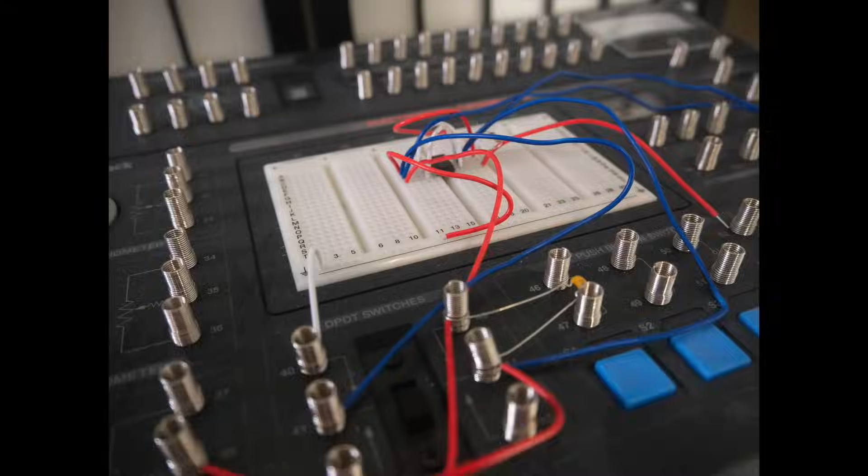Creating a two-dimensional drawing in a computer-aided design program such as FreeCAD or Tinkercad or Fusion 360 is very much like drawing in something like PowerPoint. It's really very easy to do.

But when you're creating a three-dimensional object, like this object here, you use a very different technique. Depending on the program you're using, you do start with a two-dimensional drawing. And then you extrude it, you expand it from a two-dimensional drawing into a three-dimensional shape.

But if you need to modify that initial shape, you create a second shape. And that second shape is used to cut out material from the first shape. In simpler 3D design programs, that second shape is called a hole. In more sophisticated 3D design programs, often you refer to that as creating a tool that you use to cut one shape from the other.

So before we get started with FreeCAD, I want to reinforce this concept of positive shapes and negative shapes and using one to cut the other. And because it's the easiest program available for doing this, I'm actually going to use Tinkercad.

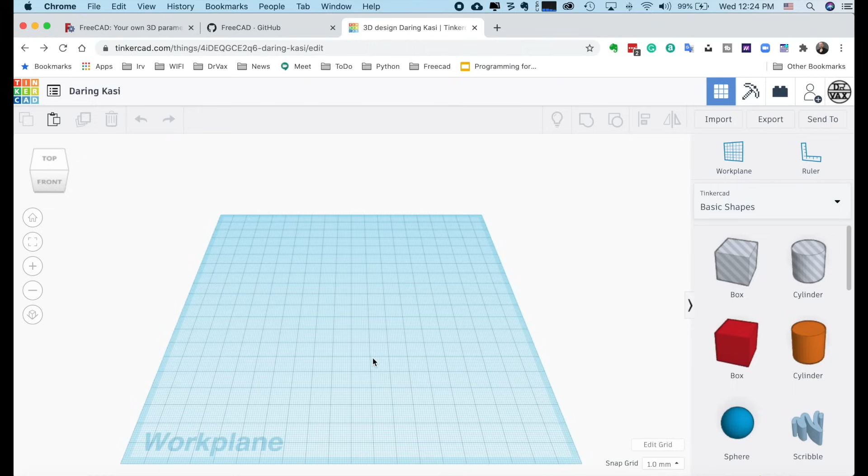So let's look at the screen together. First, I'm going to take and click on and drag a box into my work plane. Then I'm going to make it a little bigger by dragging on the corners. And a little bit taller. And then we'll drag it to the center.

Now, one of the advantages of Tinkercad is it's a direct manipulation program. You just grab onto the corners of an object to change its size. You click on the middle and drag to move it around. It makes it very easy to use.

Most professional 3D design programs do not quite work that way. And so as an example, when I try to use a program like Fusion 360, and I've used it successfully, it's a little different for me because I'm used to sort of the PowerPoint approach where you just create an object and drag it around.

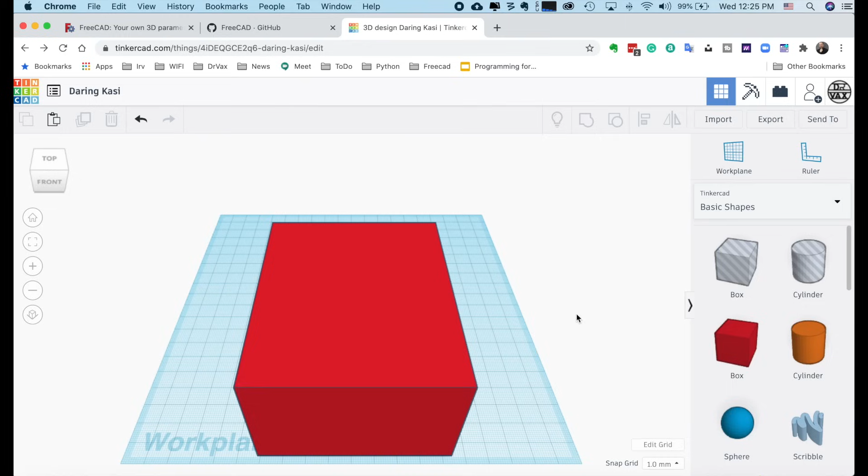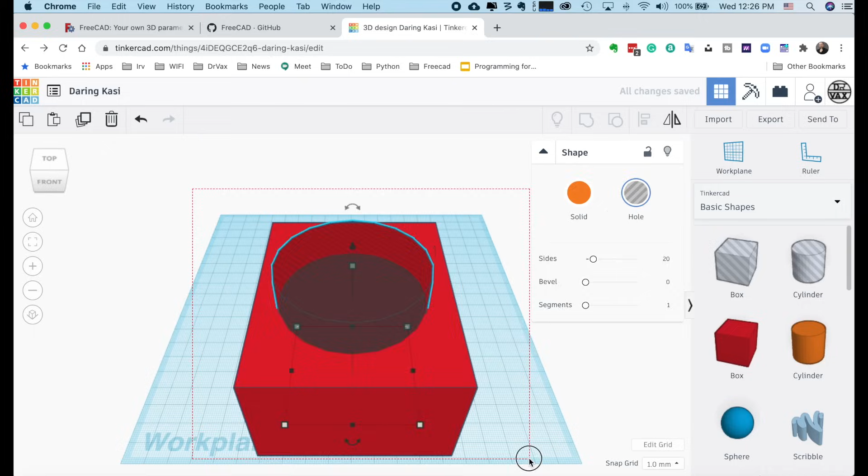Tinkercad is like that. Now, if I want to cut a hole into this rectangle, I take and I drag a cylinder into my space, and I can make it bigger in either or both directions. I can drag it into the middle of this box, and I can push it down a little bit. Now, if I group these two items together, I will have a hole in the middle of my box.

That concept of creating a base object and another object and combining it with it, or using it to cut a shape out of one object or another, is very important to understand computer-aided design.

Now, let's take a look at FreeCAD. And why bother? This seems so wonderful. Well, Tinkercad is extremely easy to use. I still use it all the time. And in fact, you can build things somewhat sophisticated.

It would definitely be possible to do something like this in Tinkercad. But how would you do it? This isn't a rectangle, it's sort of an odd shape. How do you hollow it out?

Well, in Tinkercad, to hollow it out, you could create two versions of the shape. One that is a solid, and then a second that is a hole, and group one in the center. You can hollow it out. But in a professional CAD program, actually, as you get to more sophisticated shapes, it's much easier.

So why not start with a professional CAD program? Because they're complicated to learn. So I'm going to challenge you: make the investment to learn traditional computer-aided design.

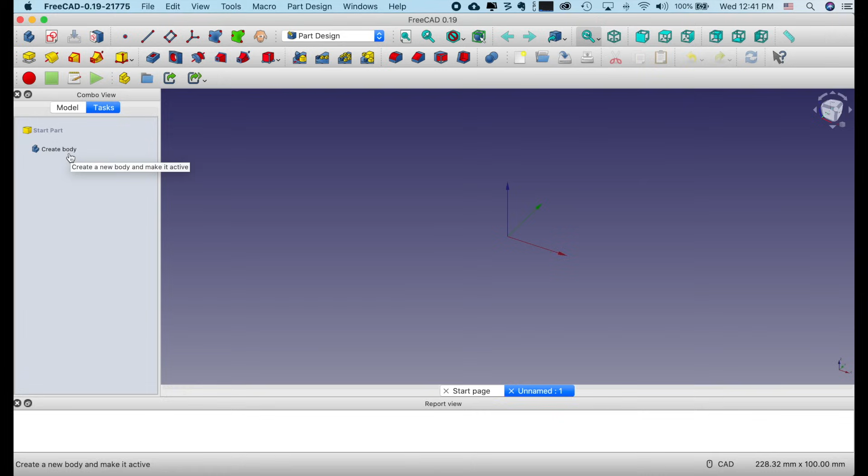In order to do something to an item, you have to have a currently selected workbench. Once again, we want to use the part design workbench. You'll see we'll have the part design toolbars here. I'm going to create a body. A body contains the part we're going to draw with. Now I'm going to create a sketch.

Now, we could model this a couple different ways. We could draw a rectangle and extrude it or pad it up and then cut out this shape. That'd be hard to do. If instead, and this is where you start to think like a computer-aided design expert, you take and draw this shape and extrude it in this direction, then your whole model is going to be created, and we just have to cut out the inside.

Now, this little area on the bottom is actually a 3D printing brim that's designed to be peeled off. I actually liked it. It made the model a little more stable, so I left it on. The reason I used a brim is this first one I printed, and here I'll show you here so you can see, it warped. See how this bent up?

3D prints warp when the temperature across the printed surface varies. You print it on the bottom, it's hot, it starts to cool here, but it's hot on the top, and conditions like that can cause it to warp. You can fix that by adjusting your print temperature, by enclosing your printer, and by adding a brim. So for this one, I actually lowered the print temperature, both the print bed and the print, and added a brim. This one printed very nicely.

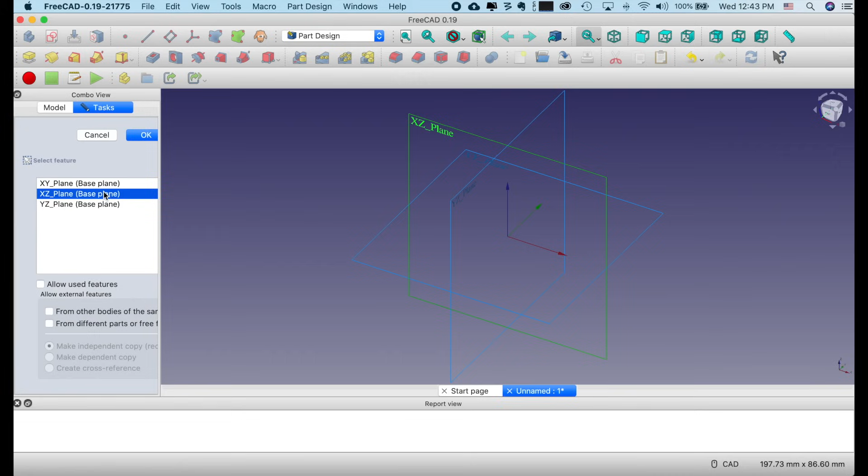We're going to model this on the XZ plane because Z is this way and X is this way. Click on OK. Now see this big dot in the middle? That's our origin. But when I mouse over one of these axes, or I mouse over that dot, it changes color. We're going to need to recognize that in the future when we want to connect dots together or place items.

So the first thing I'm going to do is select a tool. I could select a point, a line, an arc, a circle, a conic. I could select a rectangle, a polygon, all sorts of different tools here. We're going to select what's called a polyline. So I selected that tool.

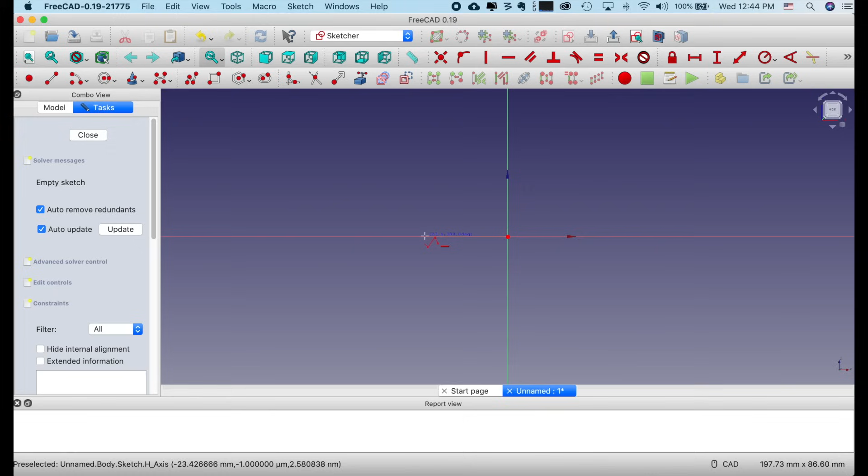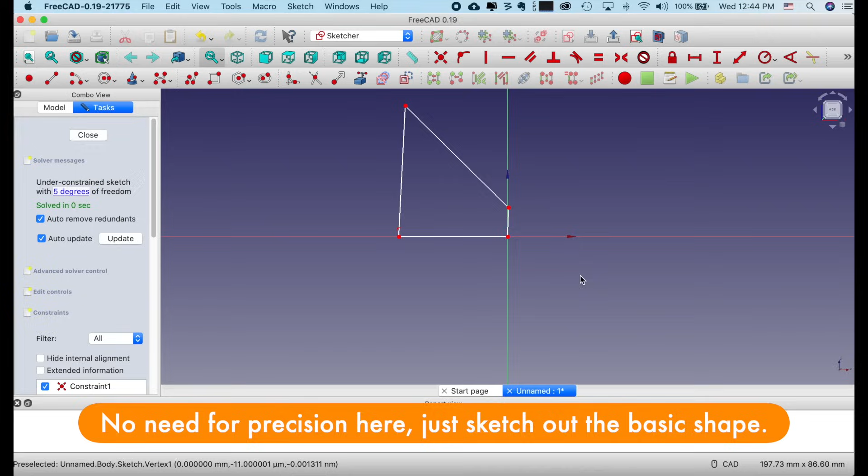Now we're going to start it right on the origin. Click once, drag, and then we're going to click on the base. So click once, and I'm clicking with the left mouse button. Then it goes up a little bit. We're going to click. Then it goes down to sort of in that kind of angle. Click. Then we're going to try to find that exactly that white dot and click on it. Now I'm going to click the right mouse button to say I'm done with the tool.

So we have sort of a basic shape here. And what we can do is you can see we can move this shape around like this. Now these axes also move around. This point here is locked in place. Why?

Because we started it on the origin, this point here is locked in the horizontal direction because it was on an axis. So how do we lock the rest of these?

Well, we use these items up across the top, which are called constraints. A coincidence constraint says make two points the same point in the same place. A point on object constraint says align a point with a line. We have a vertical constraint, a horizontal constraint. We have a parallel constraint. We have a perpendicular constraint. We have a tangent constraint.

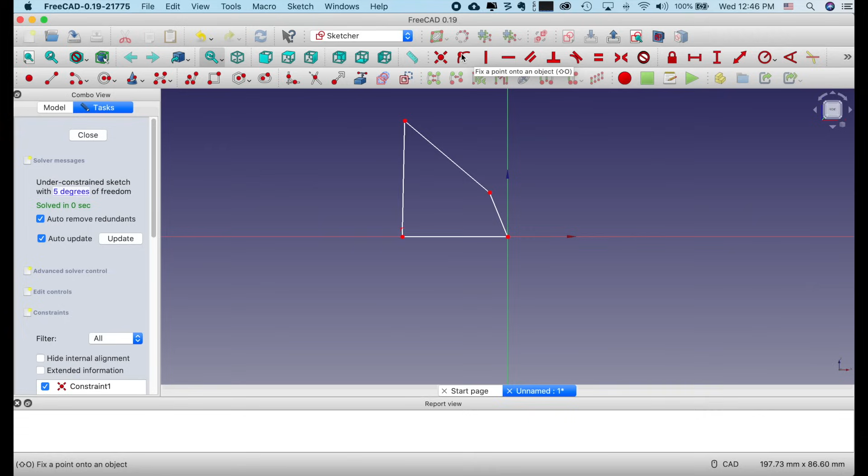This actually was not a tangent constraint, I said incorrectly. That fixes a point on an object. This is a tangent constraint. We have an equal constraint that would be used if you want to make two objects, two line segments as an example, equal. We have a very useful constraint, which is called the symmetry constraint.

And then we can create a horizontal constraint, how long it is horizontally, how tall it is vertically, what the radius is, or the amount of arc, the angle of an arc. So these are all of the things we can constrain in a model. A perfect model is fully constrained. That means that if we go to drag it around, it will not move around.

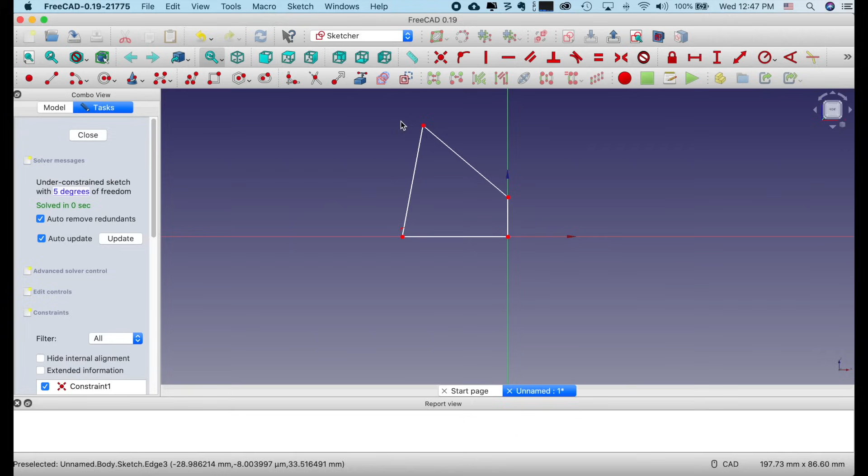Now I'm going to show you something. I'm going to take the existing constraints that are in here and delete them. So now there are no constraints on this model. So now these things aren't even connected together. My model could completely break apart when I go to move it.

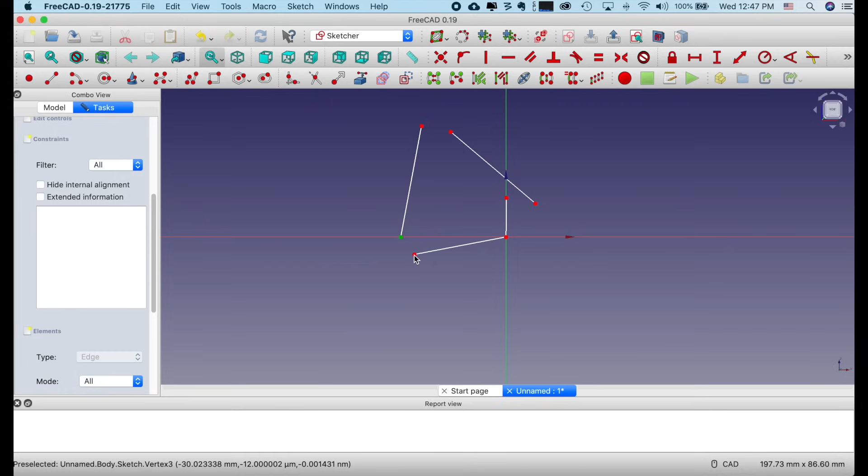Let's start with a simple constraint. We want to take the corners and connect them together hard again. That's called a coincident constraint. So I'm going to click on this point, hold down Command and mouse over till that turns yellow, then click on it. So those are both selected. And I can say they're coincident.

Bam. Let me do that the same here. They're both selected. Whoops, have to hold down Command, which is Control on a Windows machine. It's Command on a Mac. Coincident. Let's fix this one here. There we go, second one, coincident.

Now let me take and click on this line here and say it must be vertical. But now let's make this coincident with this. Aha. And so we see it's now aligned to the origin. So we can still move this all the way around.

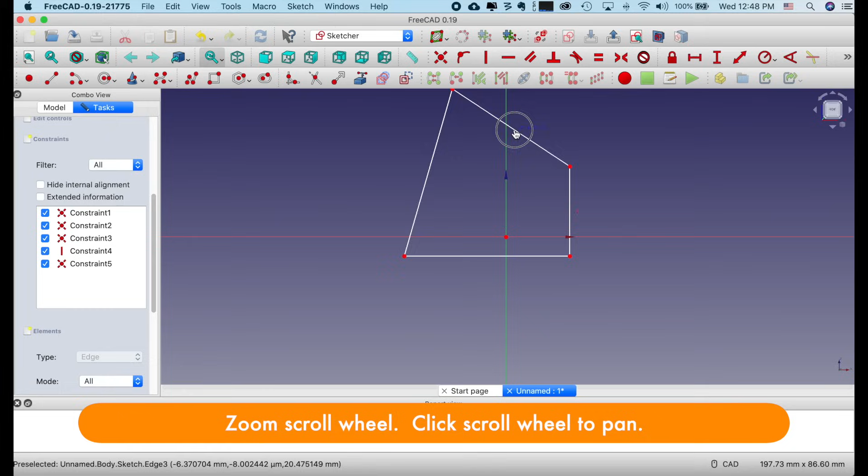So let's continue to fix this. The first thing is we have a dimension here, and we can make that whatever we want because we're just sort of messing around here. But I made that about 40. So let's click on that line and put a horizontal dimension of 40 millimeters.

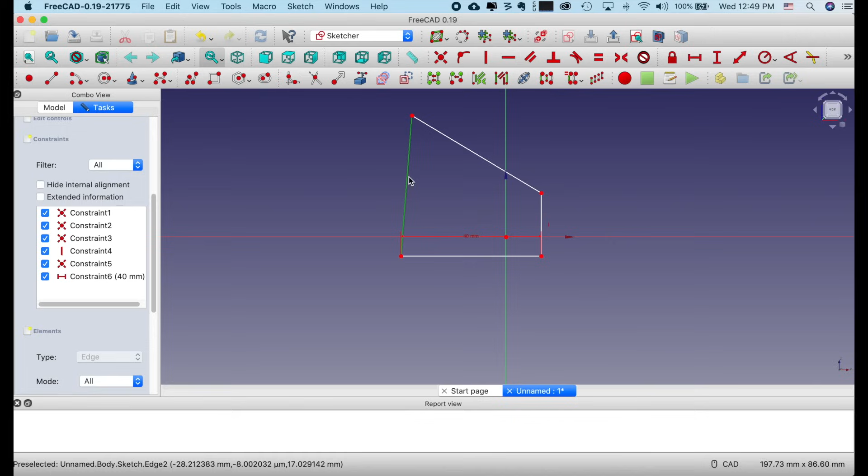And then how tall do we want this to be? Well, I would take an index card and measure it. It's about 75 millimeters. I want a little bit of the index card to show above the top, so we're going to put a vertical dimension here of 70. Let me scroll in a little so you can see it.

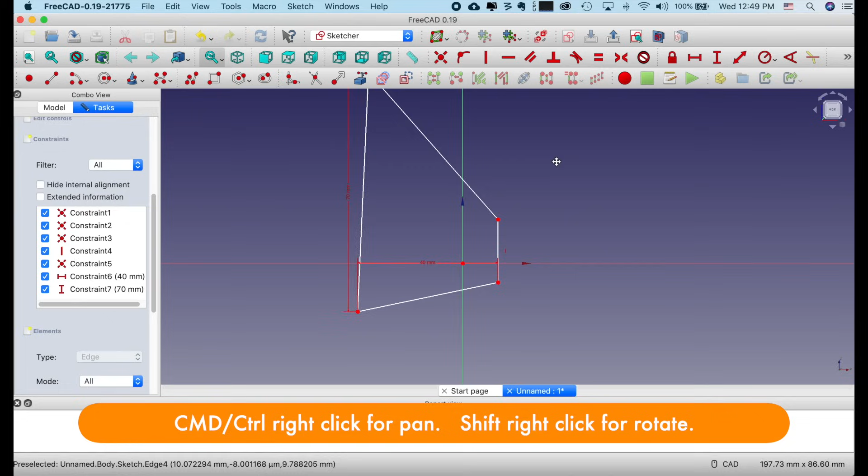Press down, whoops, press down and move this. And let's scroll in. Now I'm going to click here on the cube to show exactly the front view so that we can see it clearest. Now let's click on this one and let's make that horizontal. Now we're getting there. Now how big do we want this? Let's make this a dimension of, oh, this looks about right what we did here, so that was about 20.

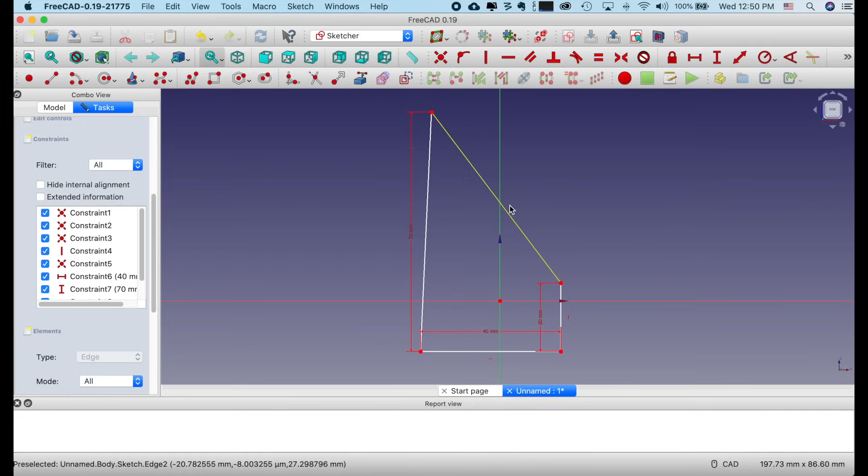Make that about 20. And now our model looks pretty good, but it still moves around. This line's not vertical yet. Let's make that line vertical. Whoops, there we go. Our model is pretty much locked together now. It's not distorting, but it's moving around.

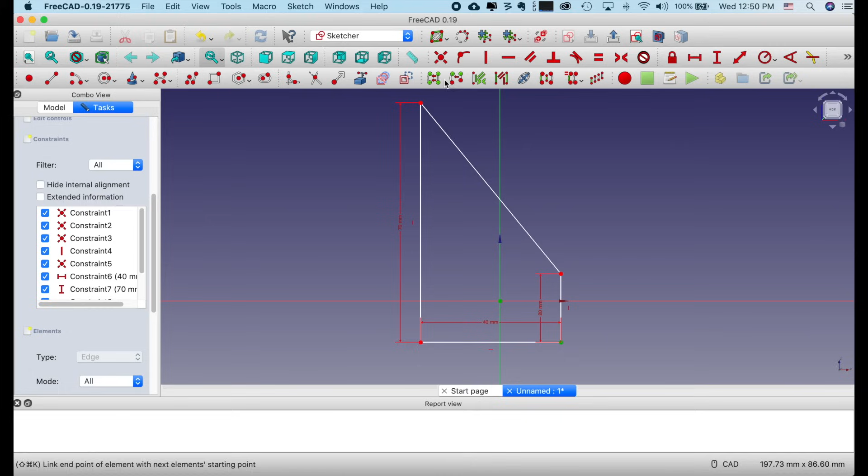So let's lock it in space by making this point, which is our origin, and click Command in this point, and we'll make those coincident. And now our model turned completely green. And we'll move it around so you can see it.

Now, if these dimension lines are getting in your way, you can click on them and drag them out. These little points here, you'll see these extra little lines. These are showing you where there are constraints on your model.

You also can go over to your model and you'll see we have a body, we have an origin, and we have a sketch. Under tasks, you can see all of the individual constraints that we've defined for this model. And if you go down a little further, you'll see all of the individual components in that model.

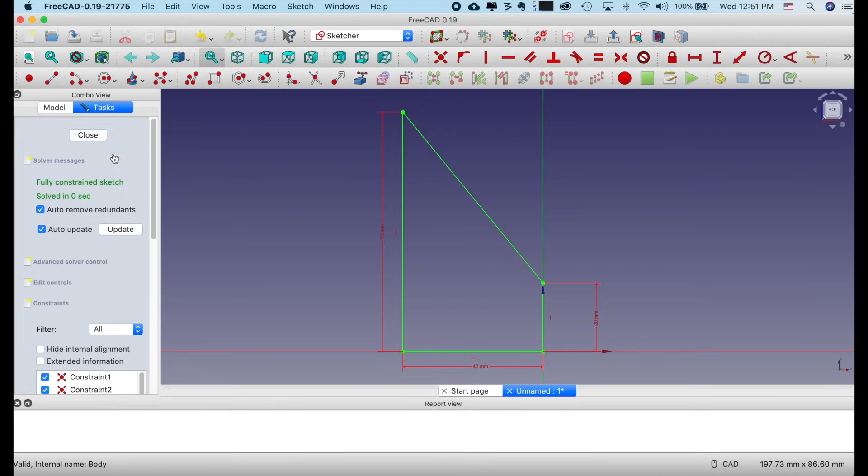So now let's close our model. I'm going to press on the scroll wheel and move it down a little bit so we can see it a little better. There we go. And you can see it's on the Z-axis and the X-axis.

Now, we want to turn that line into this. So I'm going to click on a single element of my model. I only have to click on one edge.

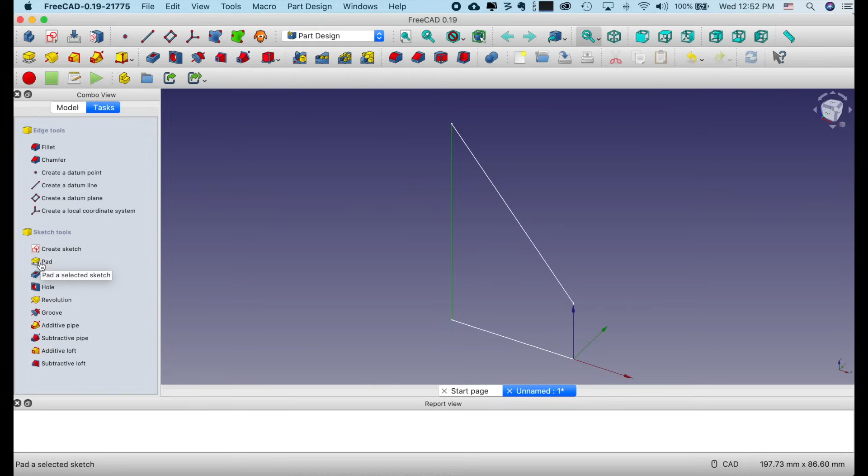Let's go back here and make sure we're on that body. I'm going to click on one edge and go to Tasks, and you'll see there's a task here called Pad. Pad is the terminology in FreeCAD for expanding out a model, so I'm going to pad that model, and now we have a three-dimensional shape.

How long do I want this to be? Well, I want it to be big enough to hold an index card, so let's make it 135.

I'm going to use my scroll wheel to zoom out, and then press my scroll wheel and move it back. Now if I hold Shift and my right mouse button, I can rotate it around.

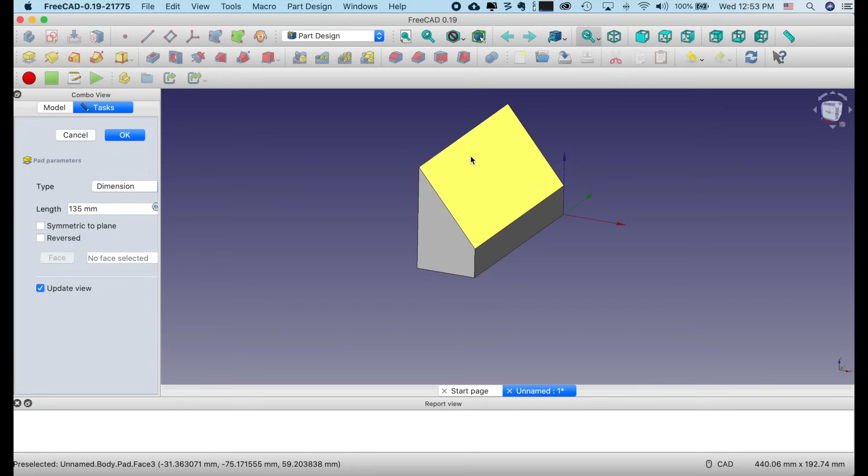Well, that looks great, except it's a solid. This isn't solid. Now, I could take another shape and use it to cut out this shape, create a hole. But there's an easier way that's available in most high-end CAD programs, and that is I can click on this shape. I'm going to go OK to make that pad permanent.

I'm going to look up here, and there's an item right here called Make a Thick Solid. On many other CAD programs, that's called Hollow Out a Shape. So let me click on that.

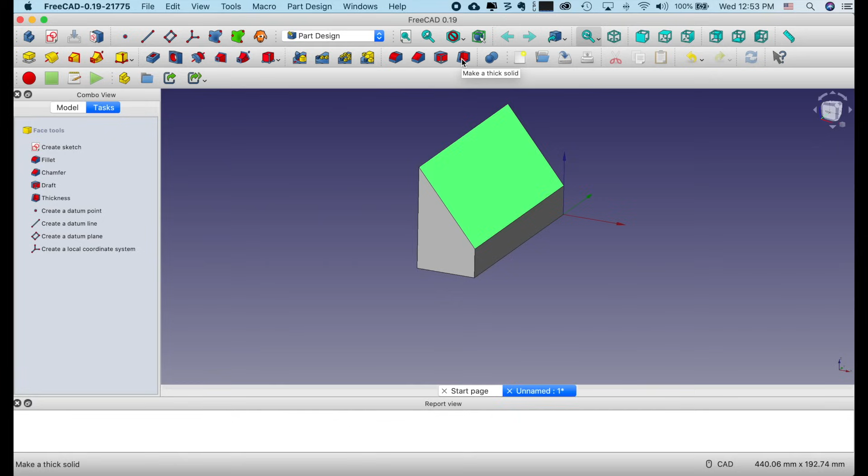You'll see it hollowed out our shape, and I can tell it right here how thick I want my walls to be. I can also tell it whether I want my walls to be on a sharp angle. You can see that there now.

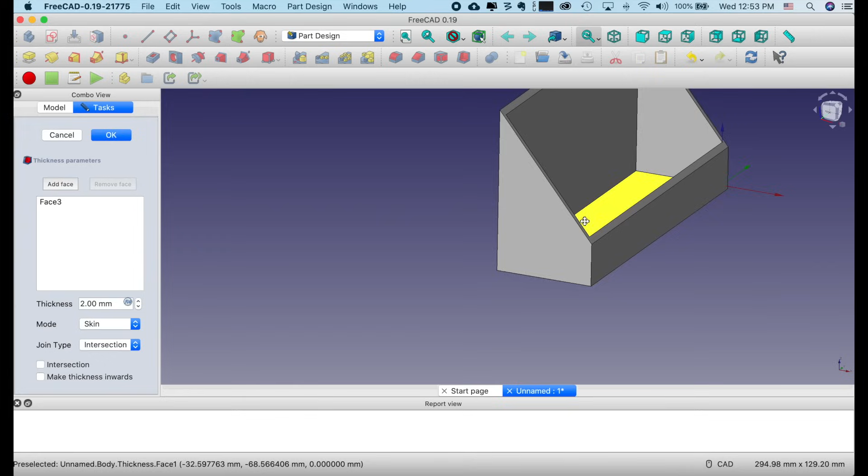Let's zoom in here so you can see the walls, or I want them to be in an arc. And I can say make the thickness inward, so now it's adding space on the inside to create a thickness, or outside. We're going to leave it outside.

So what we just created is a three-dimensional shape. Once you get this under your belt, this is a 5-minute job, maybe 10 minutes. In Tinkercad, it would be a bit longer because you'd have to manipulate the shapes in a more complicated way.

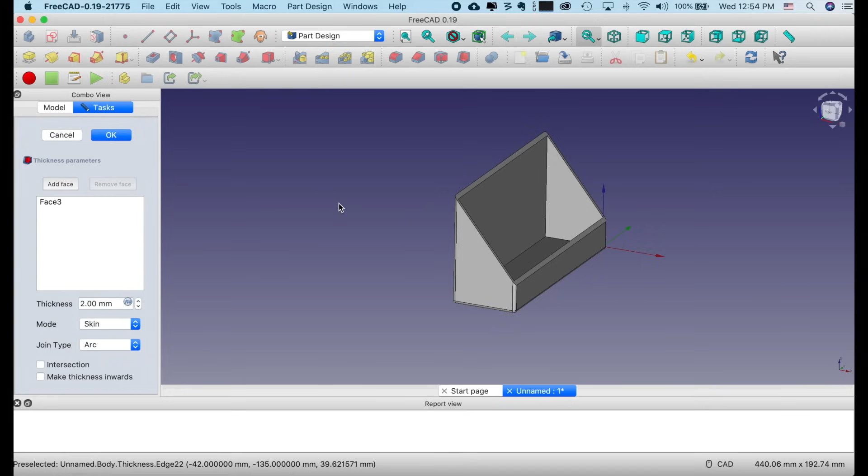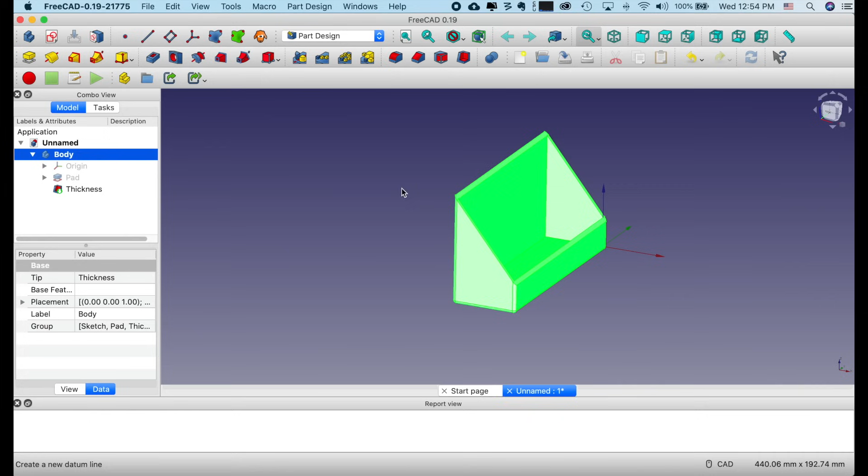So I'm going to click OK, go back to the model, and it's very important I need to select a body. If you don't have a body selected, what we're going to do next to save this for 3D printing won't work. Select a body, go File, Export, and we're going to call this Sample 3D Print.

Down here, I'm going to say I'm going to export it as an STL file, which is the standard we use in 3D printing. Save.

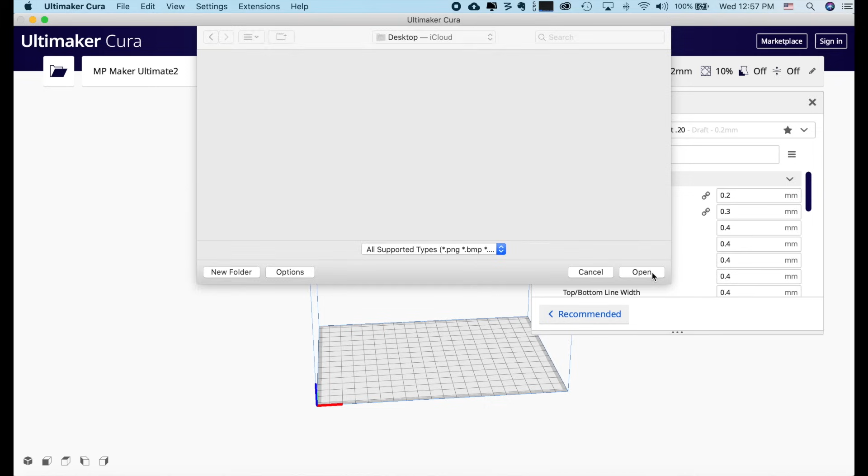Now let's open up Cura and see if we can load this model in, ready to be printed. 3D print sample STL, open it up, and there we go. In Cura, I have my print ready to print.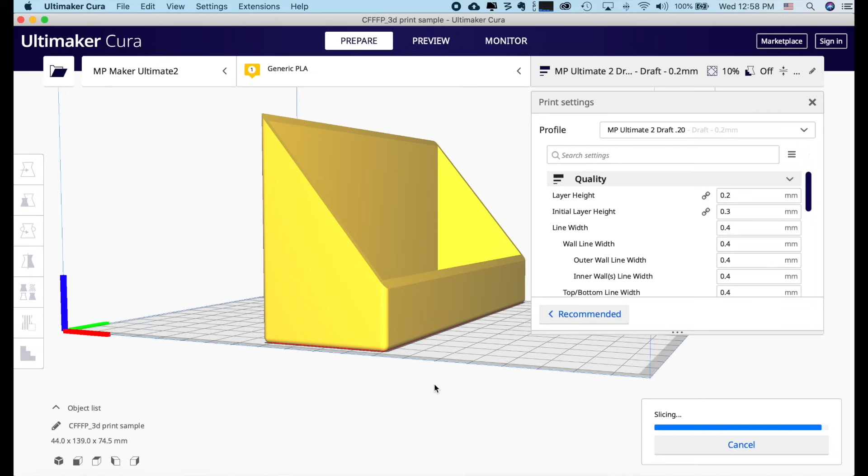I can slice it, and you can see that at a 0.2 millimeter layer height, this object is going to take, let's see here, 3 hours and 30 minutes to print.

Well folks, I hope you learned something today. Something about the difference between direct manipulation, object style, computer-aided design programs like Tinkercad, and the power of what's called a parametric design program like FreeCAD. In a parametric design program, to review, while it's not always the case, many times you start with a sketch and you extrude it or pad it to create a shape.

Now, what I didn't show you, but I'll show you in the next lesson, is I can go back and change my sketch, not change my pad, not change the hollow function, the wall function that created the hollow shape, and everything will automatically change. In a program like Tinkercad, if I want to change that base model, I have to really start from scratch.